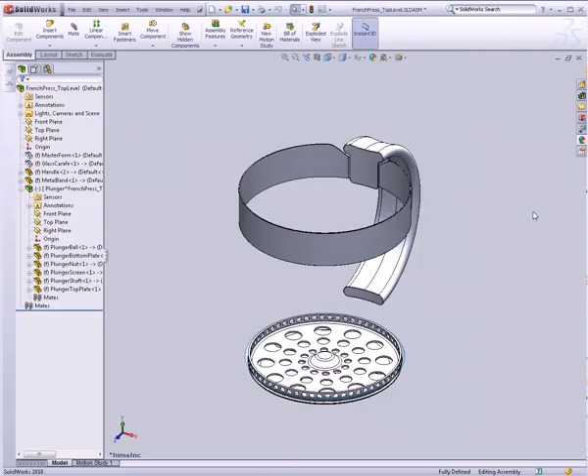The plunger is going to be really easy. Let's open up the plunger nut part, and I'm going to show the plunger nut body.

Zoom in here, go to Surfaces, Filled Surface, and fill in a couple of these surfaces. I don't know if I can do both at once—looks like it's not going to let me, so I have to do one at a time. Do the same thing on the bottom.

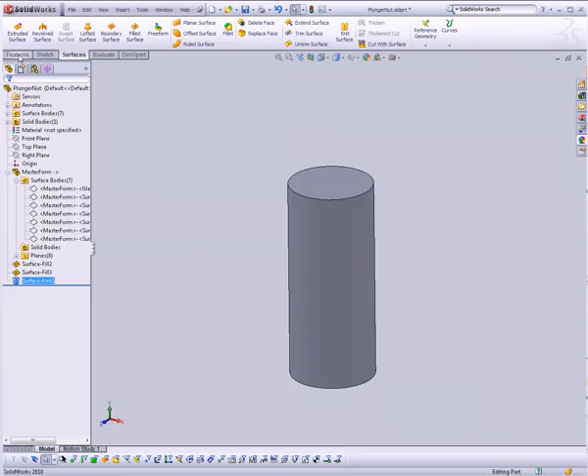Go Knit Surface, knit all three surfaces, and make sure to check Try to Form Solid. Now we have one big solid block. I can go to my features, under the Fillet tool, drop down and there's a chamfer tool I can use instead.

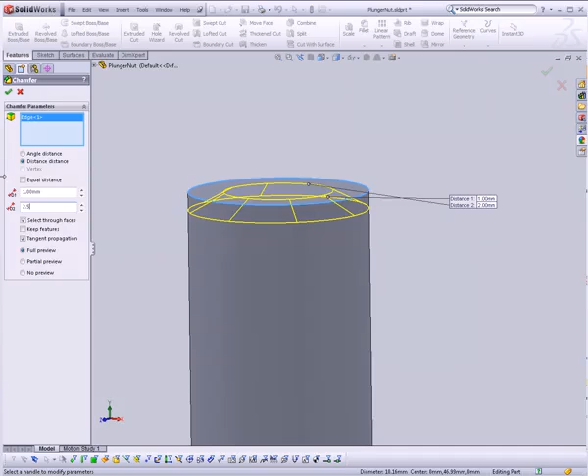I prefer, instead of angle distance, to choose distance. Choose this top edge, and set this to maybe 1 and 2. That'll make it nice and easy to control my chamfer to get it to look exactly the way I want. Maybe this is 2.5 and this is 2—that looks a little better. Click OK, and now we'll round this thing off.

With like 1mm fillets. Actually, I think 1mm is probably too big—we'll do 0.5mm. Perfect, that will be my nut.

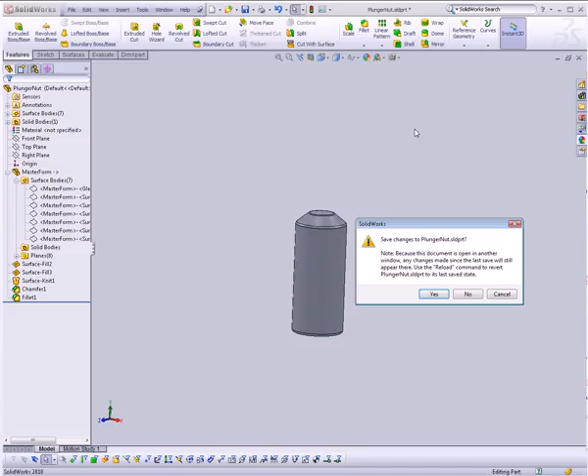We'll just pretend that that chops this thing in half. Last, we need a shaft. Let's open up our shaft. All we have to do to this one is just close it off, I think—at least for now.

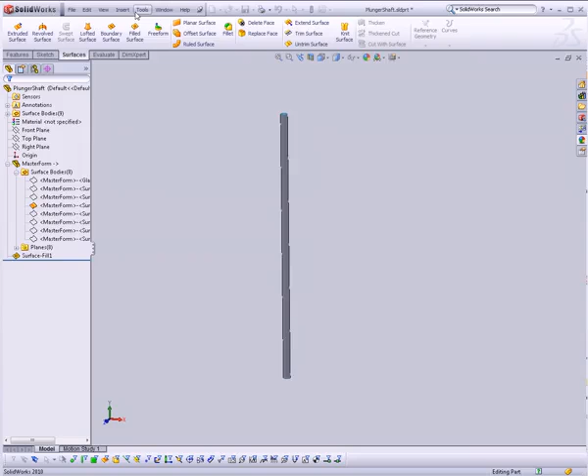We'll do the same thing: go Surfaces, Filled Surface, get that one, get that one, and knit them all together. Try to form solid. Close it up.

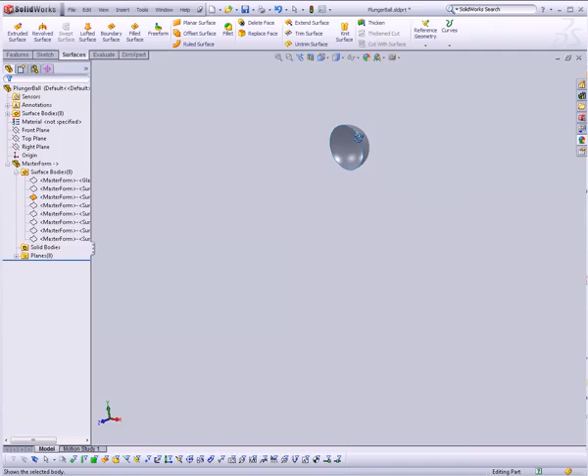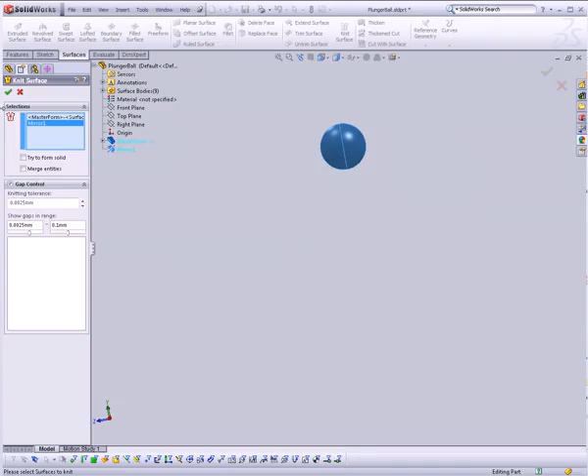And we need our ball on the top. All I'm going to do for the ball—show that surface—I'll use my front plane to mirror that ball body across. There we go. Now when I do my knit operation, under Surfaces, Knit, Solid—boom.

Do we lack anything else? I think that's it for our plunger. And now I think pretty much all we have left is the lid.

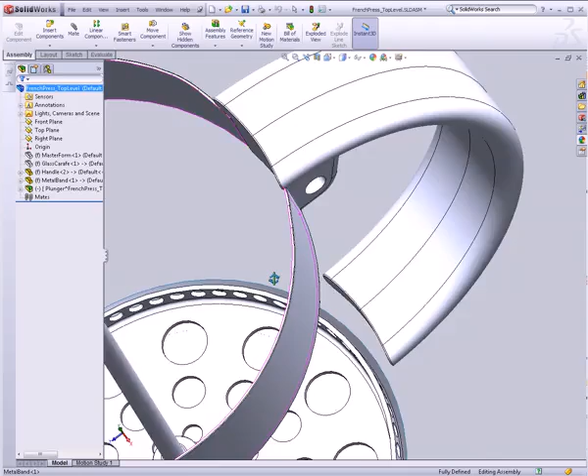Now since this was a quick video, I want to point something out. I messed something up in the master model—I made this metal band not go far enough in. It needs to be a little bit tighter there, so let's go ahead and make that change.

Let's go open the master form part, and I'm just going to edit the original sketch that makes this up. Now if I click on this surface, you see that it shows me the dimensions from the original sketch, making it really easy to change.

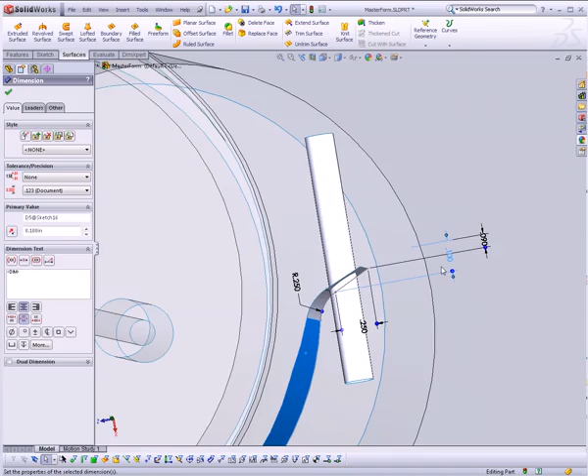So I'm just going to change this on the fly right here. Let's make this 0.1 inches, so this is nice and tight. And I'll make this 0.05. Now this is not going to update yet.

I changed those—why isn't it updated? Because it doesn't automatically update when you change it that way. To update it, you have to click on this rebuild button up here. Click on that, and there we go. That's a little bit better.

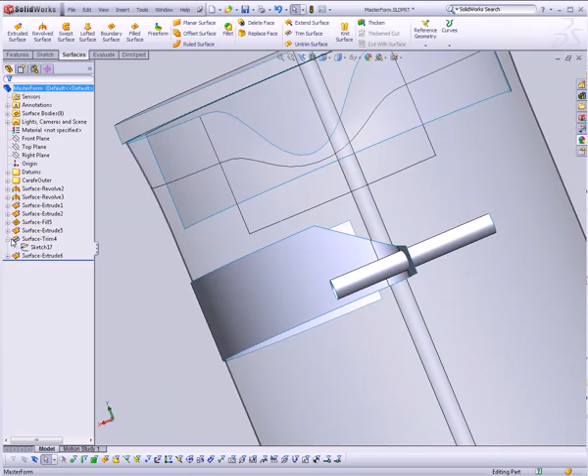Also, this diagonal line is too far out, so I need to change it a little bit. Right now it's 0.75 inches—let's go into 0.5 inches. Click the update button. I think that's going to work better for us.

Close the document, save it, and everything should just update happily. Much better, and everybody's happy.

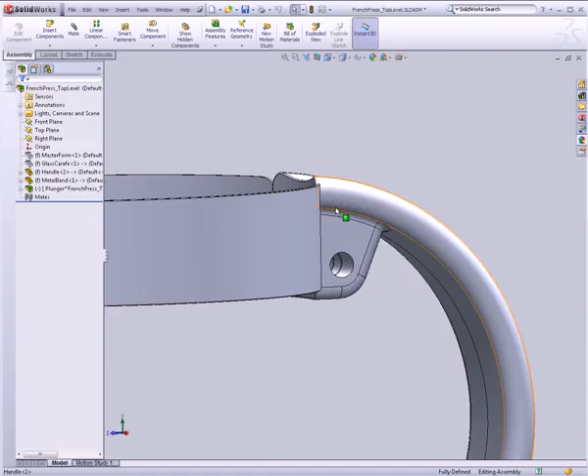The one thing is, it looks like we could also move this face back a little bit further. So let's go to our handle here. I'm going to open that part, and go back in time before we put that last fillet on. We already moved this face back a little bit because we moved both of these, but I just want to move this one back now—a little bit more. So let's go Insert, Face, Move.

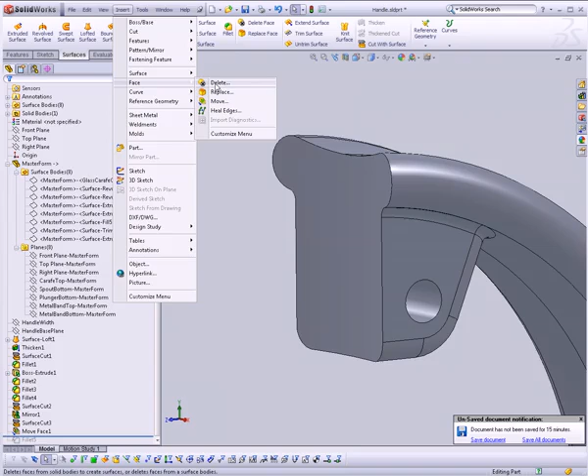You can move this face back, flip direction, and let's move it back by 0.05 inches so we get a good little distance there—0.03 maybe.

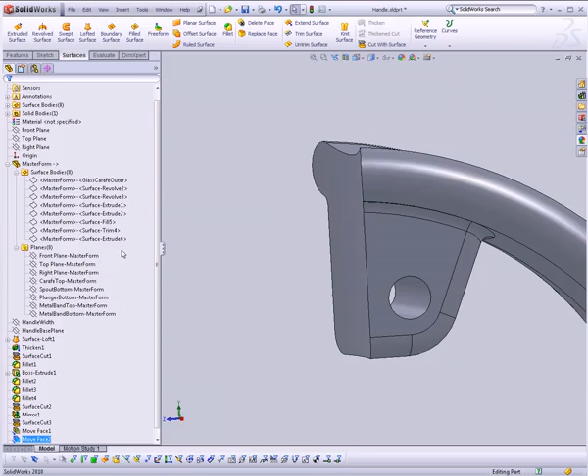I'll just roll back to the future. Close this document. That's a little bit better. Now if we were being really picky, we would add the features where this metal band connects into the handle, but I don't think that's going to matter one bit.

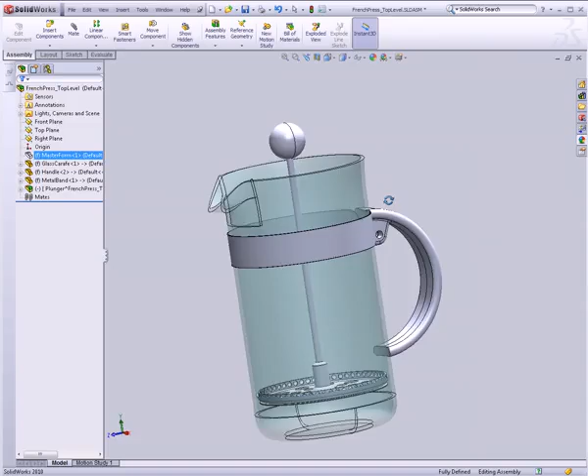Here we are, and I think our French press is coming along. Now all we have to add is the lid. Home stretch.